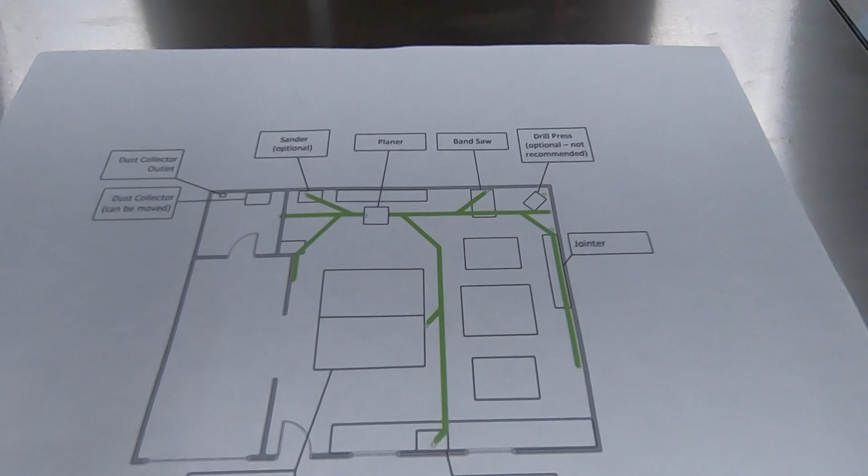Okay, so let's talk about some of the design aspects of your dust collection system. One of the first things you're going to want to do is get a shop drawing together of your shop, the layout, where your tools are or where you want them to be. And then from there, you can start planning out how your ductwork is going to lay out. In the case of mine here, I have a drawing that I made that is kind of a trunk and branch type of configuration. So the trunk goes from the dust collector all the way through end to end of the shop. And by doing that, I have the maximum suction power that I can get.

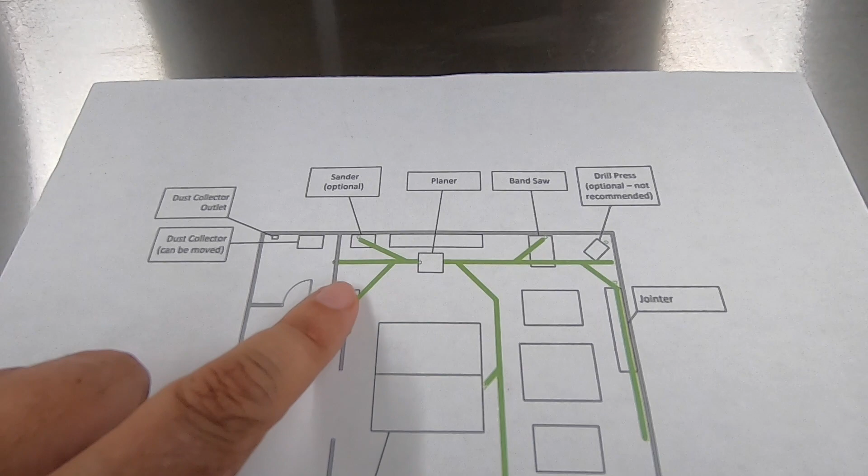It's also referred to as a centralized dust collection system, where the central is the dust collector itself, and then it branches off. So I've got my branches here that go to each of the individual tools, to a jointer, router table, miter saw, my table saw, and right here, not set up yet, but I've got a branch for a floor sweep that I'm going to use.

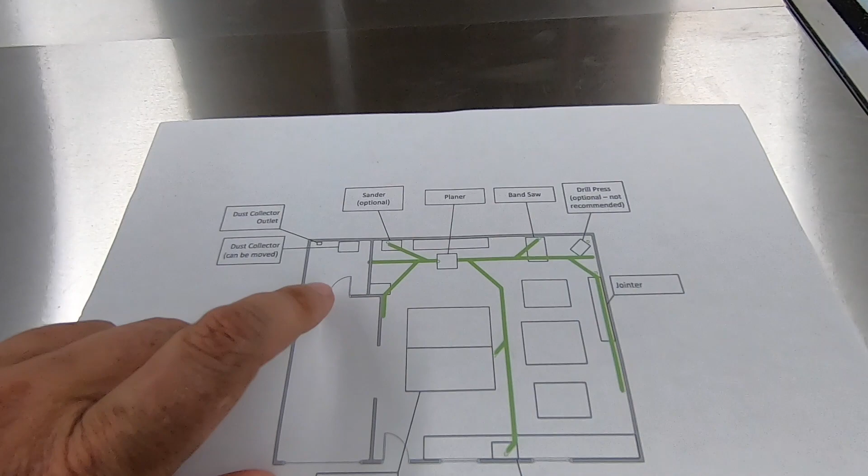And then when you look at how you're going to terminate and select your dust termination, you want to use blast gates where you can at the Ys. You'll notice here as I have my Y fitting, I've got a blast gate right here. I've got a blast gate at this Y. I've got a blast gate here at these connectors. And the logic behind that is really simple.

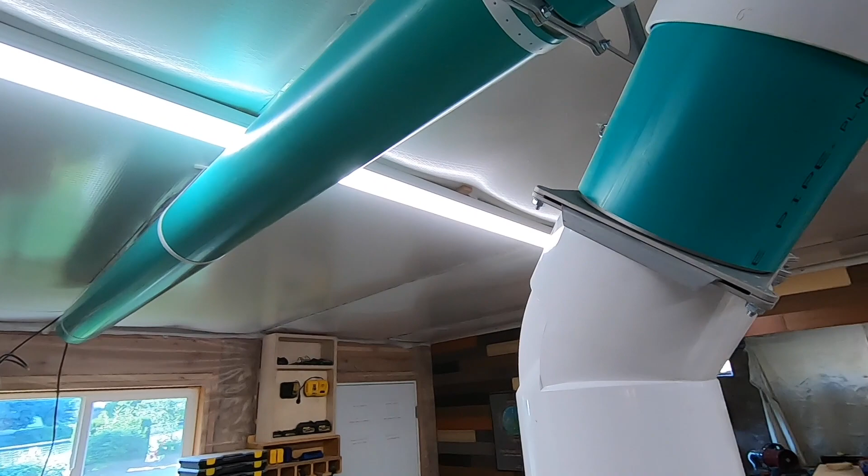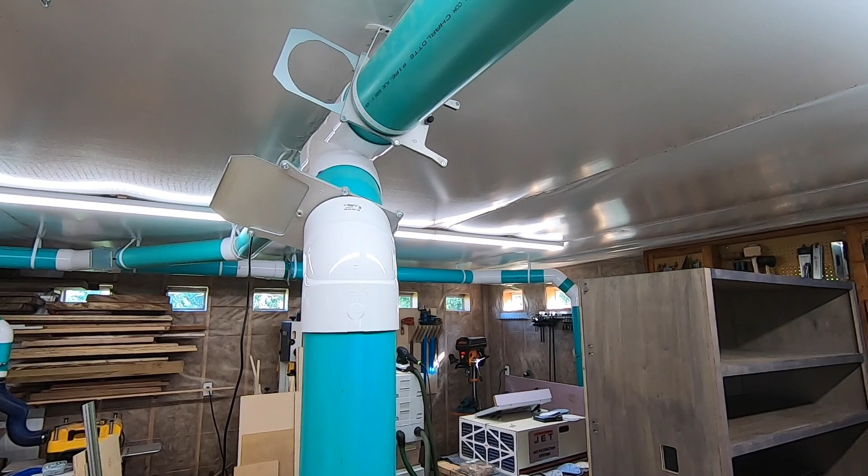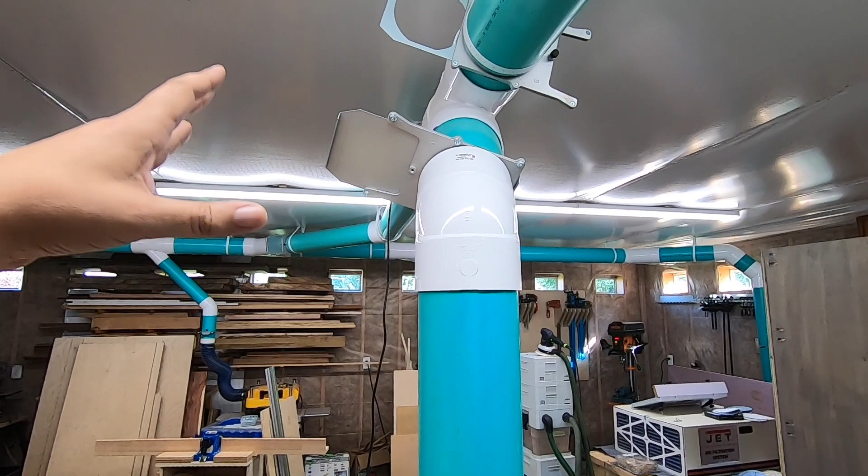When I'm plotting out how I want to terminate my dust collection and get the best possible suction to each tool, I want to terminate as close to the main lines or as close to these branches as possible. If I'm using a blast gate at the tool, that air has to travel all the way down the branch, all the way down to the tool itself. And that's a loss of pressure and a loss of suction right there. That is just going to defeat the purpose of what you're trying to accomplish. So if you terminate up here, basically you are shutting off all the air going back. You're not going to have a whole bunch of wasted air coming up and around.

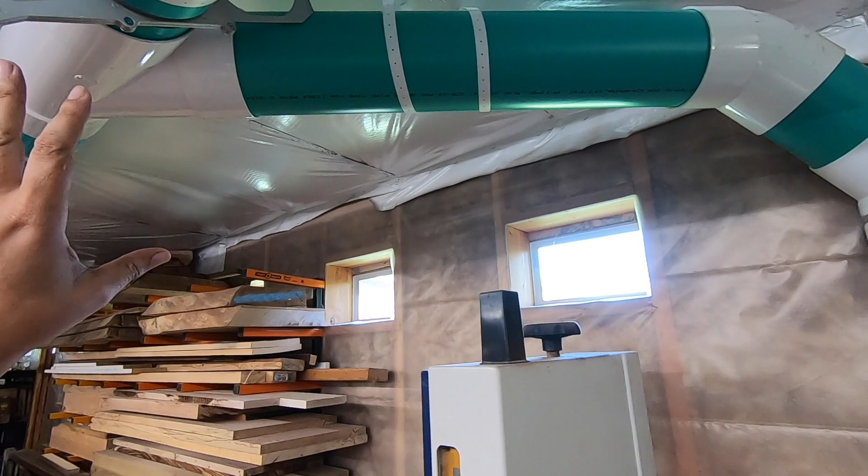So it's best to definitely terminate where you can, as close to the main line as you can. And in regards to that, you also want to make sure that you have your maximum piping down to the tool. So I have 6-inch fittings here, 6-inch piping all the way down to the tool, where I transition to 4-inch and use a flex hose.

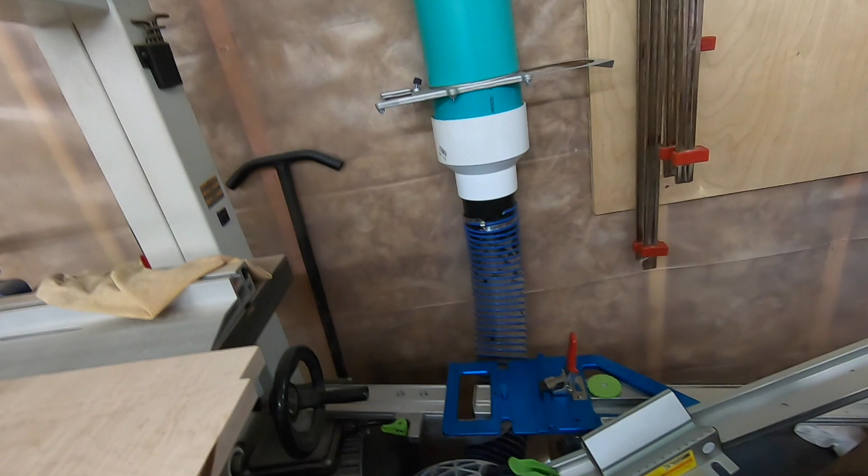Flex hose wise, you don't want to use more than 2 feet if possible. And again, this just has to do with static pressure, with CFM, overall suction. If you're using anything more, you're actually just defeating the purpose of suction. So it's best to just transition to 4 as close to the tool as you can. In this case, I've got about 2 feet of flex here. I've got my reducer, and I've got 6 inches up here.

This is an exception that I had to make. I had to use a blast gate right here close to the tool, only because up here, as you can see, my blast gate hits the fittings up here. I couldn't even put another blast gate right there. So just to explain that through.

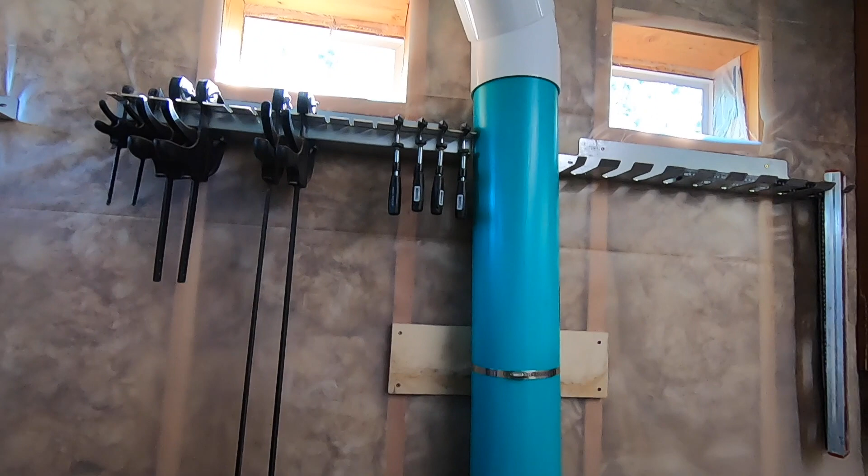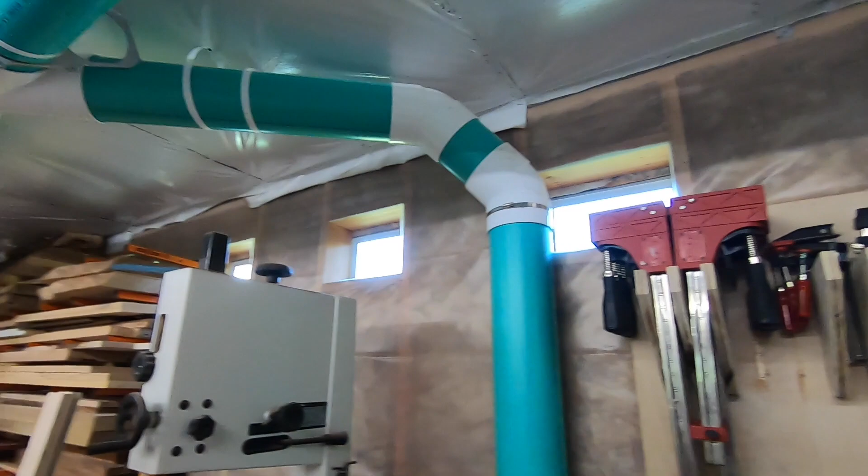And then going here over to the jointer, for example, same thing. I've got 6 inches all the way down to the jointer, and then I've got about 1.5 feet where it goes right into the jointer at 4 inches. On a jointer, there's a lot of chips, so it's even better to use 6-inch all the way through if your jointer will support it. Some of them just have very small fittings for 4-inch.

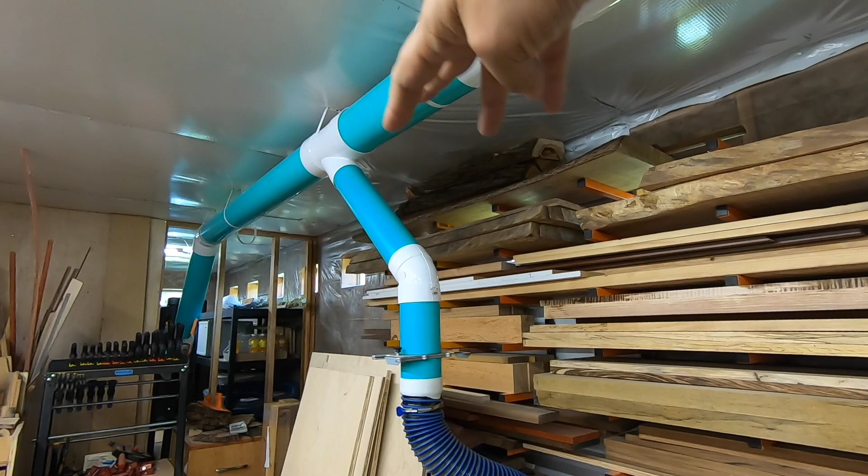In the case of my planer here, I went ahead and used 4-inch off of the 6-inch. I did a 6-to-4, and the reason for that was with a DeWalt planer, I've got a blower that's built in that blows the chips out. When you combine that with the suction of the dust collection, that made for an easy thought process to say, well, if I've got it blowing and I've got it sucking at the same time, then the 4-inch should probably be all I need for this size of planer.

Now, if I upgrade to a larger planer or something a little more heavy duty commercial, I'm going to go 6 inches straight to the tool.

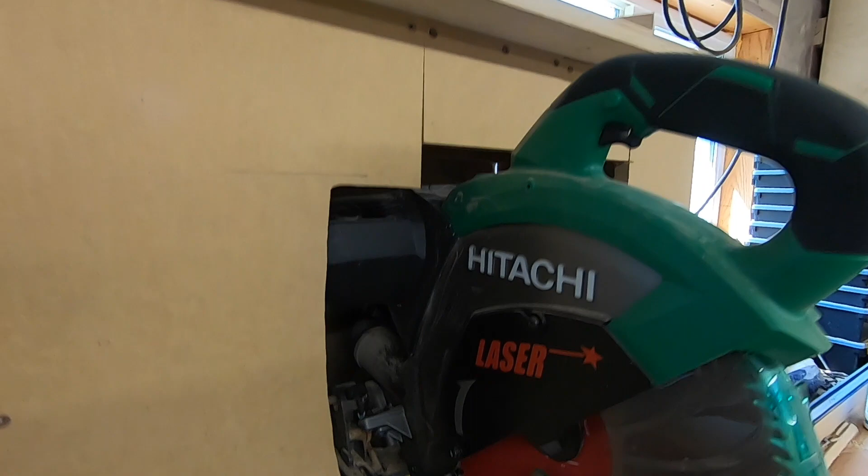Let's talk about dust collection for a miter saw real quick. Mine is still in progress, but I wanted to talk about it here because there's a lot of ground to cover on how to get dust out of a miter saw. One of the aspects of containment that I used was I built this little miter saw box that fits around the miter saw. It helps contain a lot of the dust. Sometimes, depending on the type of wood you cut, it still tends to get out.

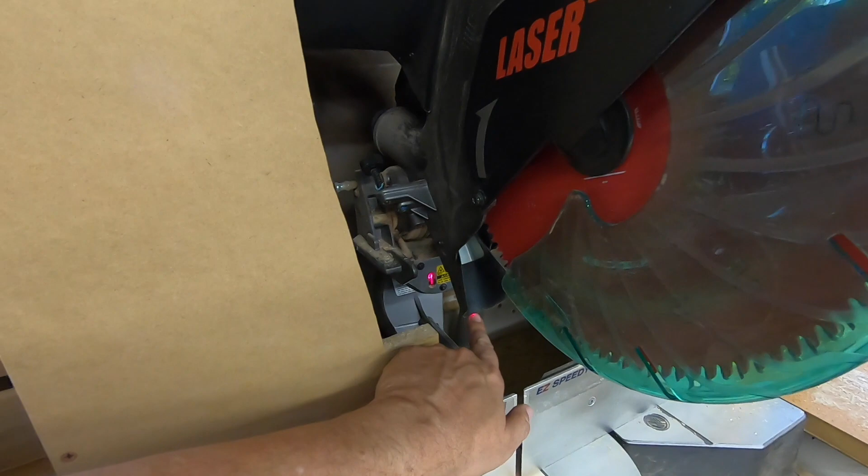So that was one of the reasons I wanted to actually use the dust collector rather than having a vacuum under here, which I do right now. I've got a fine vacuum under my miter saw, but the dust collection on a lot of your miter saws is very lackluster. Sometimes you have these smaller shrouds, and they don't pick up a lot of dust. If you read reviews, even for your high-end miter saws, the dust collection is always something that's a little bit left to be desired. So how do we overcome that?

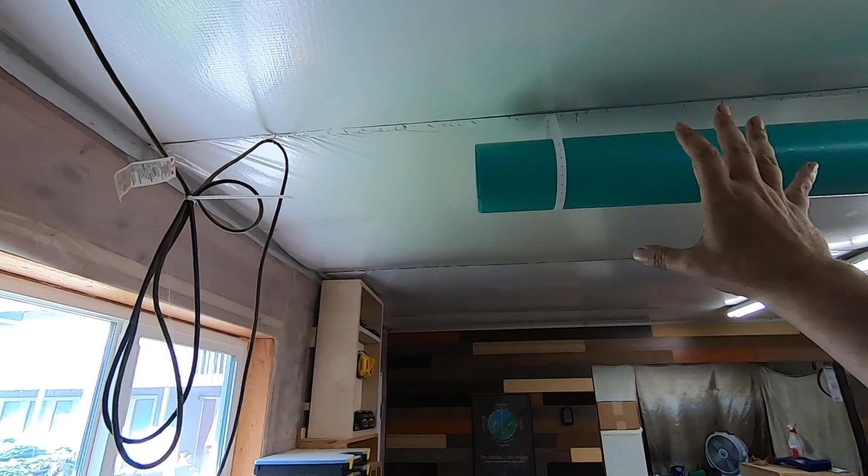In the case of what I want to design here, I want to have a pipe coming all the way down here into my miter box, and the way that this miter saw is tilting down as you're making your cuts, you can see where the dust is going to come out. The dust is just going to be spitting out of this area here. And so if I've got a 6-inch duct that's going to come right down into this, and that suction is going to be at about 600 CFM, based on my other measurements, that's going to pick up a lot of this ambient dust, especially when I'm cutting through larger pieces of wood or plywood.

And so I wanted to make sure that I had it coming down as close to this as possible. So it's going to actually stick through the box. It's not going to just stop at the box, but it's going to come through right back to just behind the motor housing here and stop. And that way it's going to go right in, and that should alleviate a lot of the problems with this.

Now you'll see some configurations where they have a pipe coming in at each side, your left and your right. You can do that with a transition, like a Y that transitions into two 4-inch. I think you're going to get a lot less suction out of that, but I also think it would be effective in getting that ambient dust side to side. In my case, I believe that a 6-inch is going to be the best way.

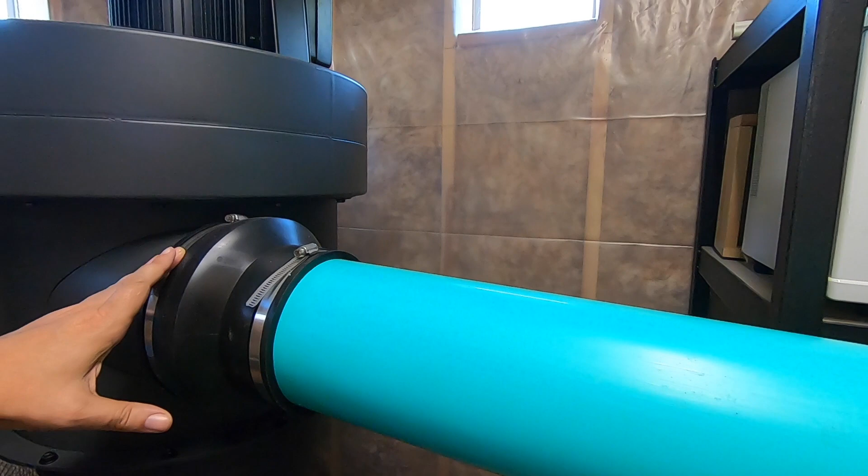If I have flex hose or bending off right to a 90 degree, or some people have a bunch of Y fittings right here, that is defeating a lot of the suction power right at the source. And the last thing you want to do is defeat it at the source. You can get a lot of turbulence or a lot of shaking or vibration if you do a lot of your fittings right at the source.

And so just in what I've read and what I've looked at from a design perspective, I found that running about 5 feet more, if you can, of straight PVC or straight ducting, and then going into a soft transition to get where you need to go, is going to be the best result for you. I think running it this way for me worked very well, and I had very little loss of pressure at the tools themselves.

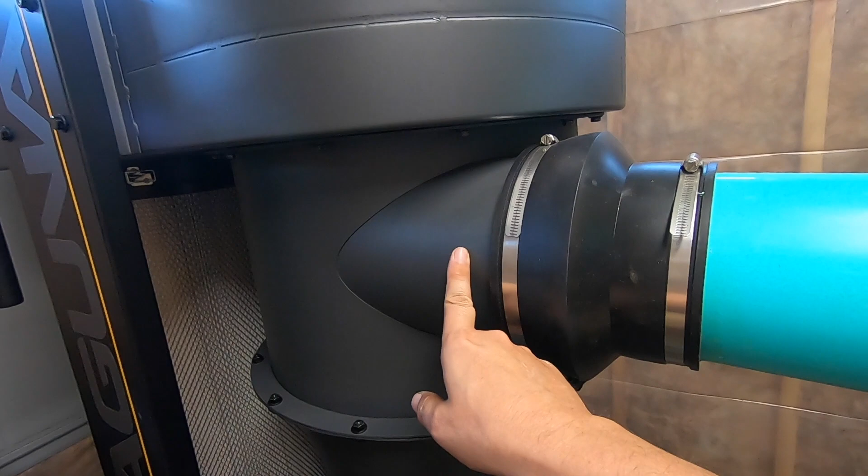I also reduced right here at the dust collector. This dust collector does 8-inch, and then it's got a fitting that has 4 inches. Or you can just go straight 8, and I went ahead and used a Fernco reducer to go from 8-inch to 6-inch, and that's how I was able to keep 6 inches all the way through the system up to each tool.

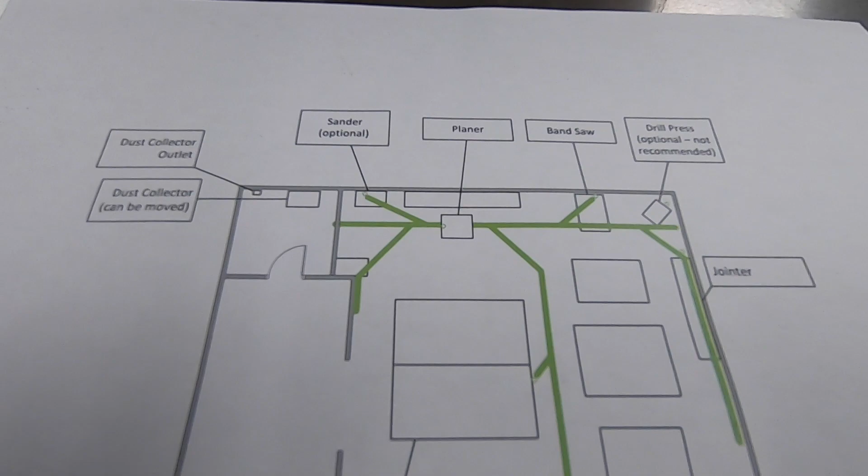So let's talk about a few of the don'ts in dust collection. If we go back to my shop diagram here, this was in my early drawings. You'll notice here how I have a Y and then another Y right after it. You want to keep your Ys flowing in the same direction each time. If you look at a tree and branch configuration, you'll notice that you have a branch, a branch, a branch. These allow for the better part of dust collection. They are all going in the same direction back to the dust collector.

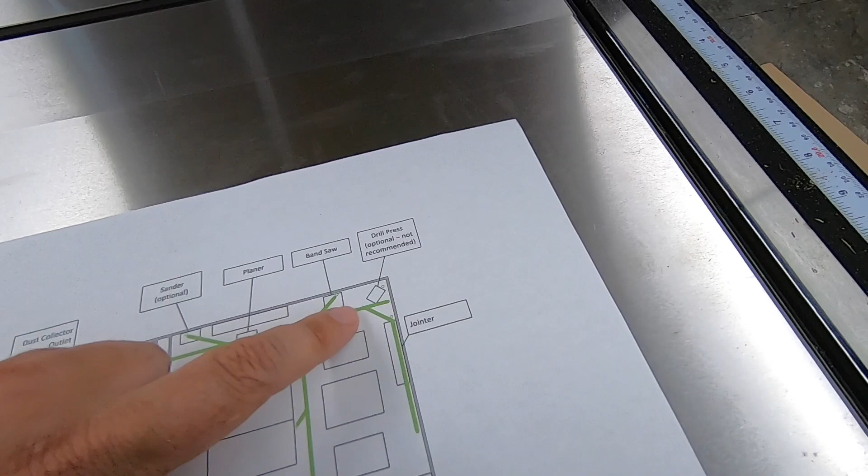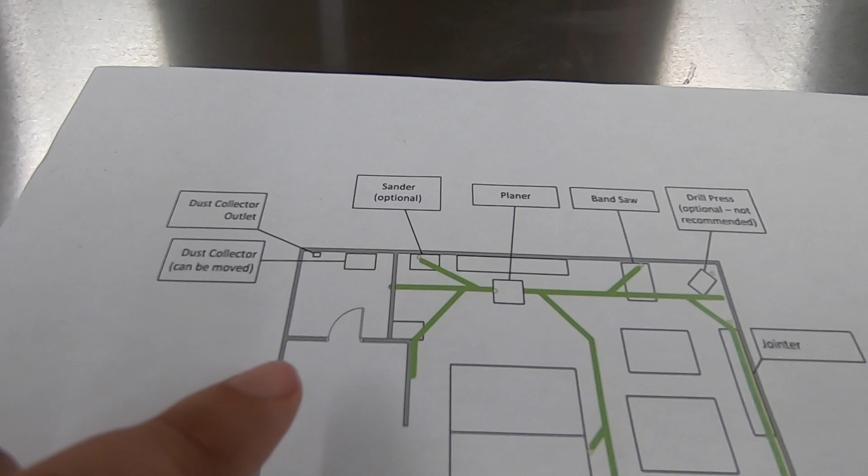Now, if you look at these over here, you'll notice that I went back this way and back this way. This is an absolute don't. Will it work? Yes, it will work, but you're going to reduce your suction significantly, just because you are trying to flow back, and you're actually going in a forward motion here and then back. You're going to find clogs or potential traps here in doing that.

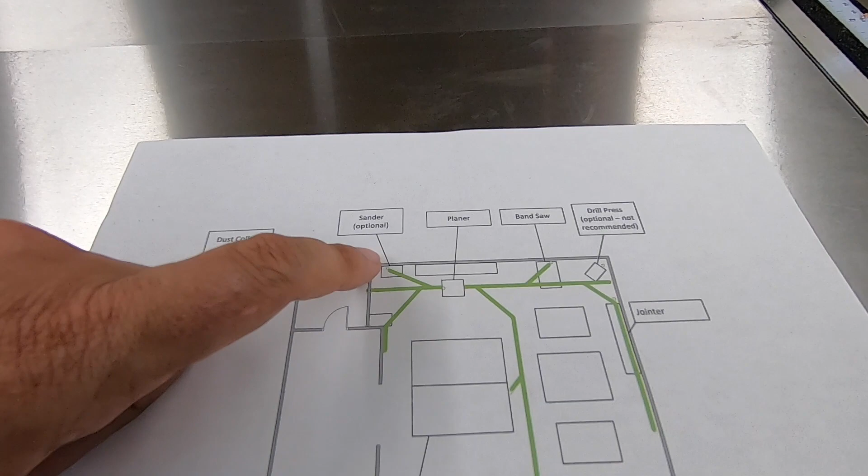So coming out here from my dust collector, the best thing I can do is transition this way and make a branch this way, and same thing over here to my sander. I could make a transition this way instead of the opposite way to have better dust flow.

Another thing, which I talked about a little bit earlier, is making sure that your blast gates are as close to the central part of your branch or trunks as possible. Blast gates at the tool itself reduce a lot of the pressure. In the case of my table saw here, I've got a blast gate right here just for the purpose of my table saw itself and my future overarm dust collection. I like to be able to control those as I need. Blast gate wise up here though, again, trunk and branch.

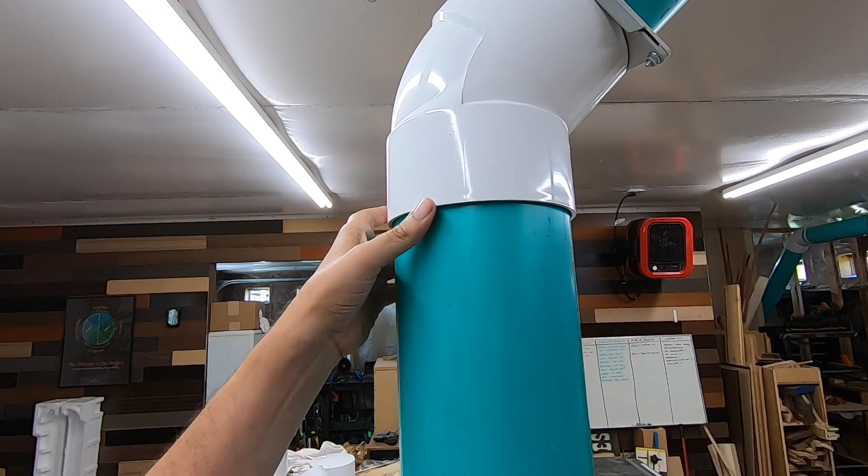So in regards to the fittings themselves, I've had some questions: did you use PVC cement or anything to fit it all together? And the answer is you really don't need it. In fact, you can just fit everything together. One of the benefits of that is you could actually resize, or if you need to change something or you move a tool, you can take it apart and put it back together. I can use silicone tape at the joints here, which I've purchased to make it as tight or as loss free as possible.

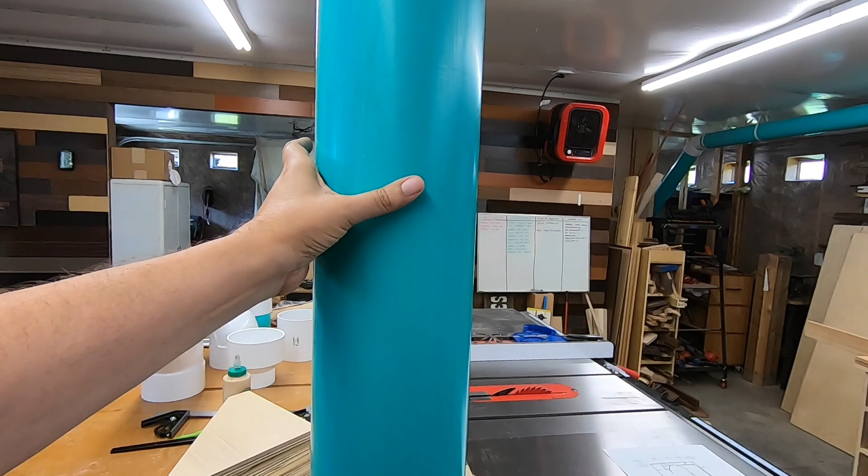Where I did use cement is where I drop down here to a tool, and the logic behind that is this piece right here plus your blast gate is kind of heavy. So right here I did go ahead and use PVC cement, and that way it doesn't just fall off. But everything else up here is completely loose and fully adjustable, fully able to be disassembled, and that way I can change things out on the fly if needed. Well, that's a high-level view of my dust collection system.